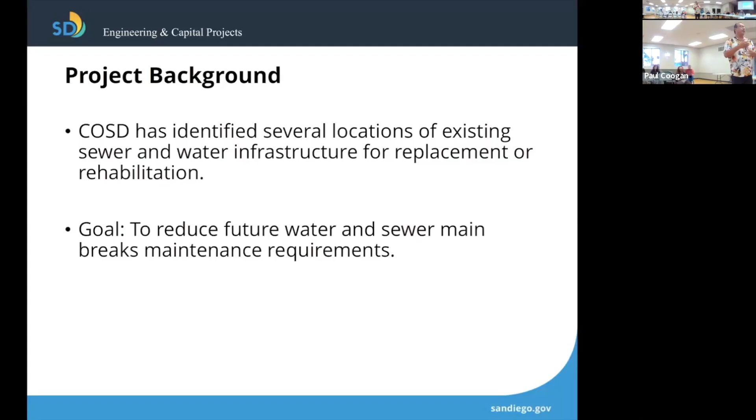So what we're doing is replacing over 1.6 miles of existing AC asbestos cement water mains with PVC water mains that will last about 100 years. So this will be the only time you get a presentation for this area, unless you're around in 100 years. We're also going to be constructing approximately 0.2 miles of new water mains.

Other improvements include water services—these are the lines that go from the main to the water meter outside the properties—valves and appurtenances including air valves, and they may include cathodic protection, all these little fittings that go into building a pipeline. Also, fire hydrants will be installed or relocated. There's a certain standard where fire hydrants need to be within a certain number of feet, so in designing this project, they're making sure the fire hydrants are all within code.

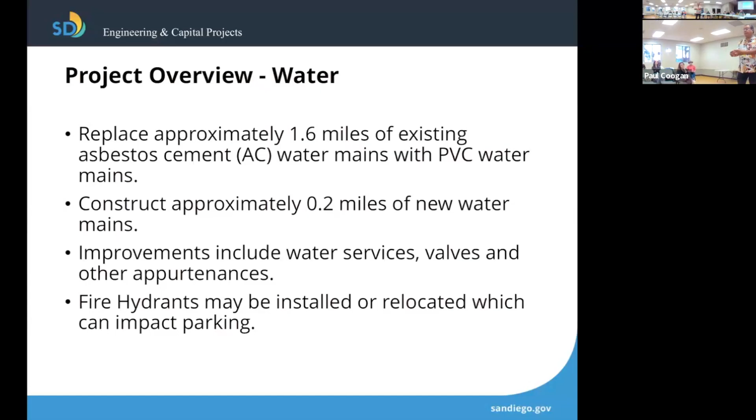And yes, we may impede some parking by putting fire hydrants in a place where there wasn't one before, but we'll talk to the residents. Remember, these hydrants are being put in the city's right of way.

For the sewer, just a little more than 0.5 mile of existing vitrified clay and concrete pipe sewer will be replaced with PVC pipes. We're going to rehabilitate about 1.25 miles of existing VC sewer mains, install new sewer manholes, and rehabilitate other manholes. If you haven't seen the process of rehabilitating manholes, it's pretty cool.

Also, the installation of manholes is interesting because they go deep, and it's amazing how they find exactly where the lines are and how it flows. I am in awe of engineers and what they do. I can't do it, I can just talk about it, but the way they do it is great. And if you ever feel like just walking up and asking if you can take a look, they'll put a hard hat on you and have you peek down the hole. Go ahead.

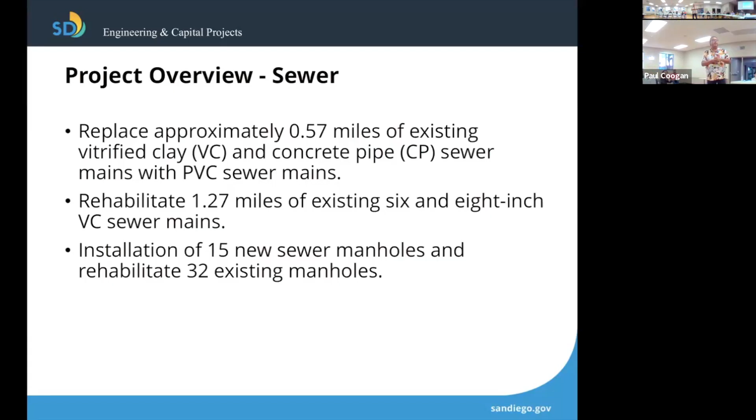Part of every city project involves improving curb ramps, and when I say improving, the ADA standards change all the time. So part of these pipeline projects includes the assignment for the builder to improve the ADA ramps, bring them up to code. In some places, we may not be going just right on the street corner, it may be off in the middle of the street, which gives a nice line to a curb ramp on the other side of the street. But when we do that, there may be some street parking that gets eliminated or some landscaping, but remember, that's all within the city's right of way.

And then we were tipped off that there was concern about the intersection at Arthur and Mansfield, which does not have curb ramps. It's missing 3 curb ramps. Those curb ramps will be installed, and the other one that's there will be upgraded to meet the current standards. So that area is included.

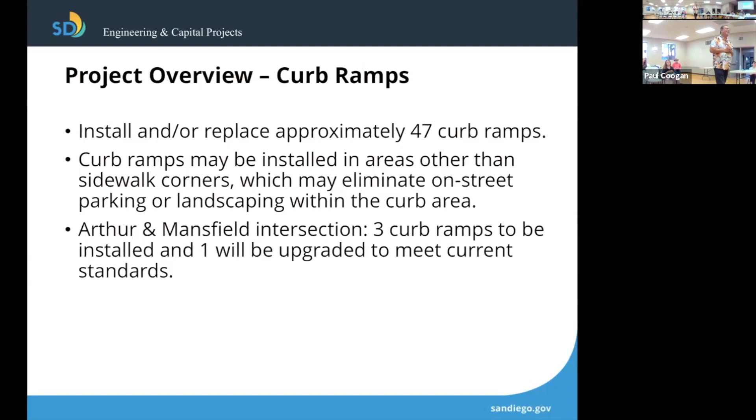Also, if you didn't get one, we have the handout, the fact sheet here that has the map of the location of where we're working. So if you didn't get one, let us know. We were able to spread them out before, a couple of the people came in a little later, but that map is there.

So when we work in neighborhoods like this, and this is all residential, we are going to be impacting parking. When we're working, we are required by the city to put out temporary no parking signs at least 72 hours ahead of time. Please pay attention to the dates and also the hours. If you see that the dates may have expired and we're still working in there, give me a call and we'll get that corrected. But if we are working in that area and you have not moved your car, you will get towed.

The project will also have city-approved traffic control. What we're doing when we're closing the streets or maybe doing a temporary detour isn't random, it's studied, it's signed off. So the traffic control is approved.

Trench restoration: the area that we dig up will be trenched, and the trench will be covered with an asphalt covering at the end of working in that area. At the end of that project, I'll tell you how we're going to go ahead and cover up that trench with pavement, but I'll explain that in just a couple of seconds.

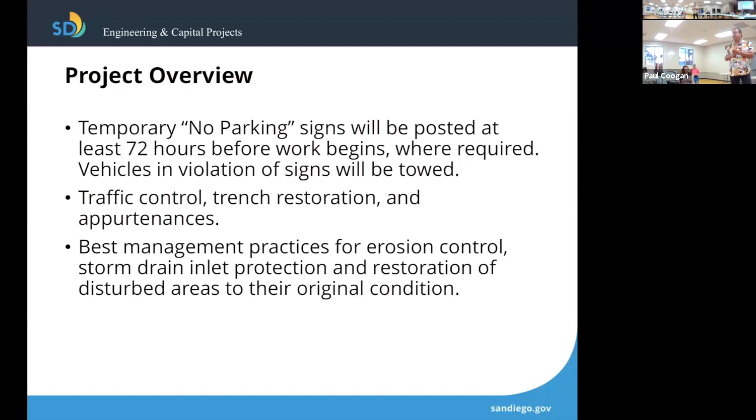And then of course, our best management practices for erosion control. We don't want anything going down the drains. The city keeps a really close eye on the debris of these projects, and the contractor could face a fine, they don't want that. So we are very careful about protecting what goes down the drains and within the street, dust, etc.

This is a design build project. What the city does is they put these projects out to bid, and an engineering firm and a construction firm team up. They decide their approach and also their costs. They submit that to the city in competition with other design build teams. The city scores these and has their formula as to how much they rate for the plans, how much they rate for the total overall budget, and they give the award. Again, the award for this project went to Michael Baker International and TC Construction. I do want to say our project schedule is subject to change, so we will let you know if anything changes, but right now, summer of 2027.

So we received some questions ahead of time, and I want to go ahead and address these now. There's an undergrounding project that's coming in this area. We have coordinated with the undergrounding project, and they will follow us in terms of street resurfacing.

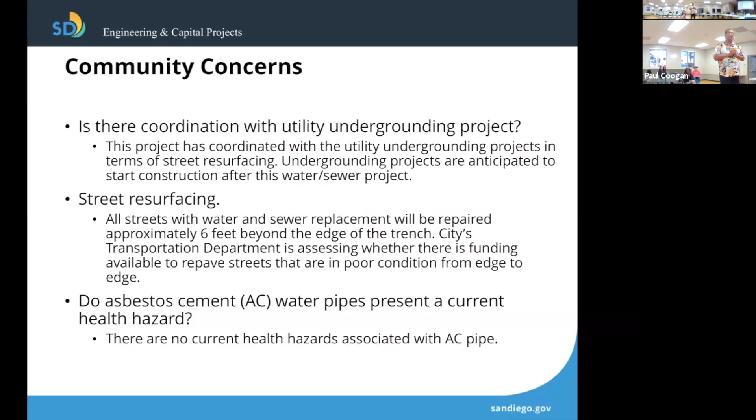Will the water pressure be increased? Well, there will first be a decrease in water pressure, but we are going to utilize our 2-inch high line along the curb. These are pipes that go along the curb that hook into your water meter. Because they're 2-inch and they're serving a large area, you're not going to get as high pressure as you would if we were on the water main. So want to let you know that if you see a high line in front of your house, your water pressure isn't going to be the same as it was, but it will come back once we set you up with the main line. Also regarding the high lines, please exercise caution when parking next to a high line.

Don't park on it. It'll break and it'll knock the water out for everybody down the line, and then it has to come and get repaired. It does happen. We do our best to educate the public about this. We just ask, if you see somebody parking close to a high line, do a neighborly thing and say, hey, watch the pipe, because we want to make sure we have water.

The new water main on Collier Avenue will improve hydrant flow capacity. And just know that the hydrants, before they get put into service, are pressure tested to meet current standards. So we don't anticipate that you will have any loss in that water pressure.

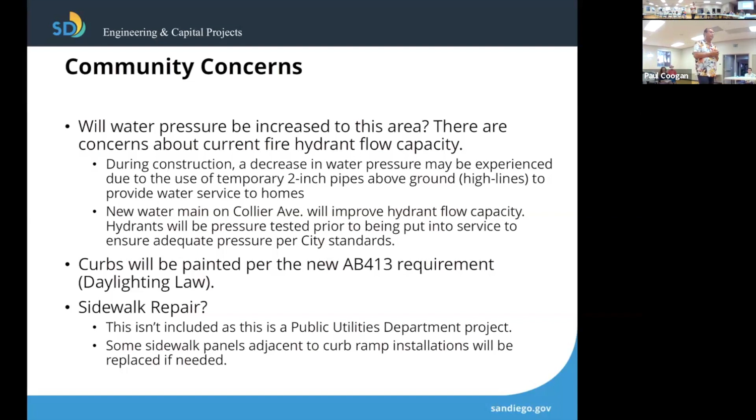Drainage issues. Our engineering firm, Michael Baker, is looking at methods to improve drainage in conjunction with where the curb ramps are, because we want to make sure that we don't flood out those curb ramps.

What we will not be doing is leveling out any streets. We had a question about whether the crossing at Collier will be level. This project will not do that. If we can urge you to go to another part of the city and urge them to do it, you do that by going on the Get It Done website and filling out a ticket saying, you know, you may want to take a look at this, but that is not in the scope of our project.

And finally, can community serve cookies and coffee to the crew? Please start with cookies and coffee and then work your way up to full meals.

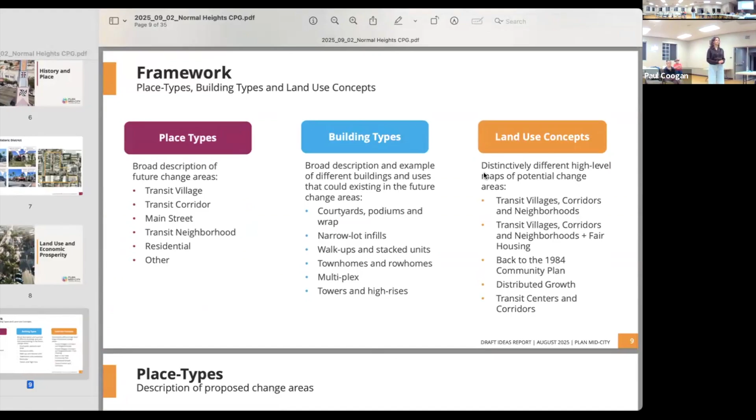These are the framework of the land use section. We're going to dive into place types, building types, and the land use concepts to help break down this chapter. I'll go into each one now.

Next, transit neighborhood and residential: this is medium and low density residential, might have some corner stores, access to transit, jobs, and neighborhood serving uses within walking distance. Any other area: this is little to no change, including single family zoning, as well as some lower density residential areas, schools, civic, public land, parks, canyons.

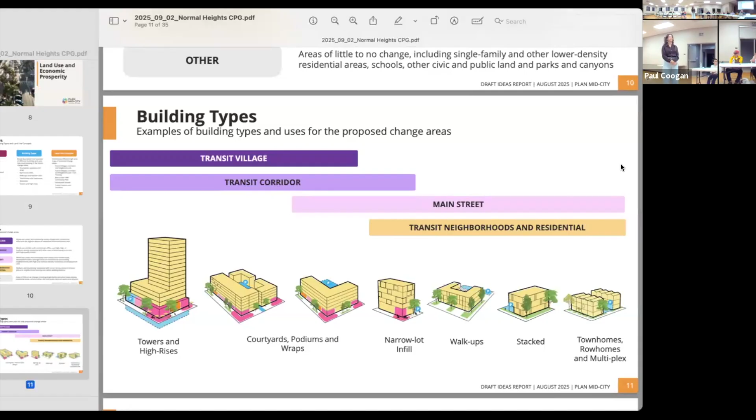On the next slide, building type. These correlate within each of the place types. You'll see the place types from the previous slide on the screen, and these are the building types you would see within each. For example, in transit village and transit corridor you might see towers, podium, or courtyard buildings. Moving into Main Street and transit neighborhoods, you might see more narrow lot infill, townhomes, duplexes, that sort of building type.

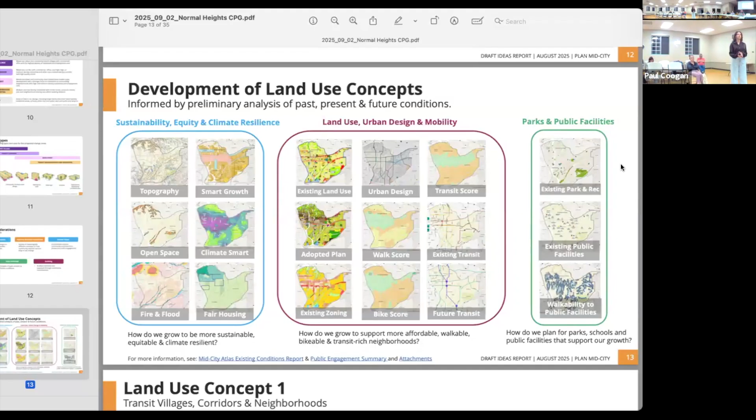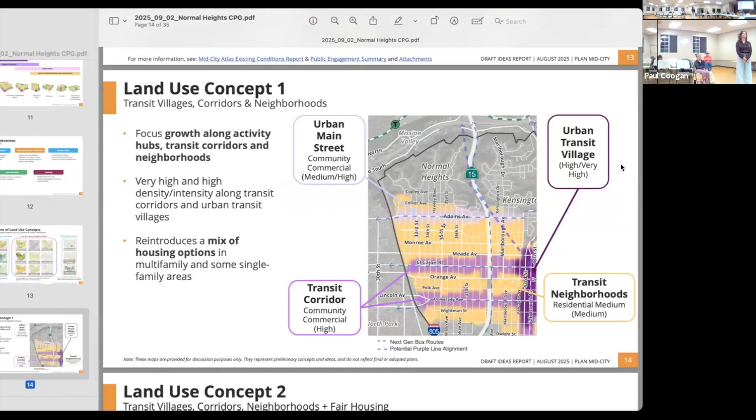On the next slide I'll walk through the first one. Again, there are 5 draft concepts. This first concept focuses growth along activity hubs, transit corridors, and neighborhoods. You'll see very high and high density intensity along transit corridors and urban transit villages, those purple colors, and it reintroduces a mix of housing options, multifamily and some single family areas, in that orange color.

On the next slide, land use concept 2. This is pretty similar in the sense that it focuses growth along the activity hubs, transit corridors, and neighborhoods.

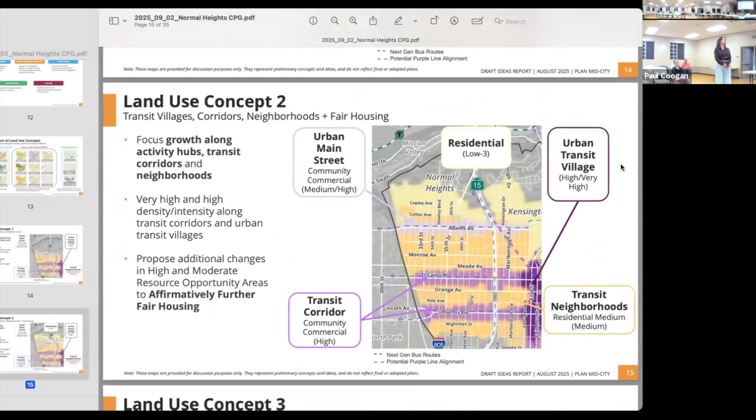It also has very high and high density intensity along transit corridors and urban transit villages. Where it differs from concept 1 is that it proposes additional change areas in high and moderate resource opportunity areas to affirmatively further fair housing, shown in yellow on the map.

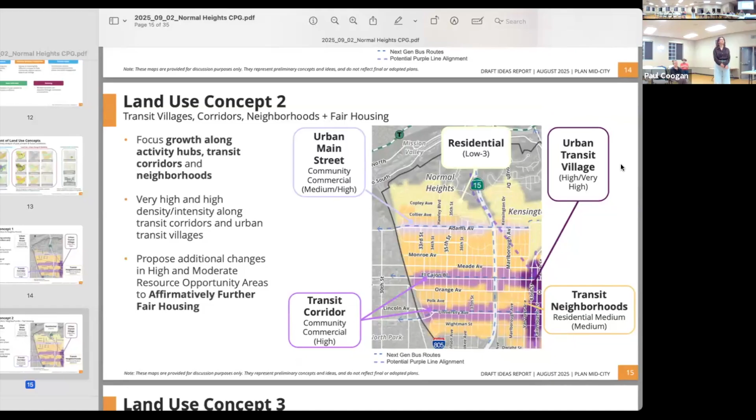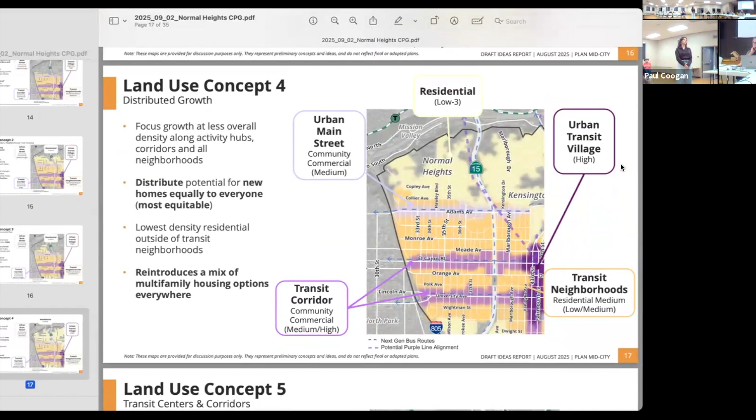Land use concept 4: distributed growth. This concept focuses growth at less overall density along activity hubs, corridors, and all neighborhoods, distributing the potential for new homes equally to everyone. Of all the land use concepts, this is the most equitably distributed in terms of change areas. It has the lowest density residential outside of transit neighborhoods and reintroduces a mix of multifamily housing options everywhere.

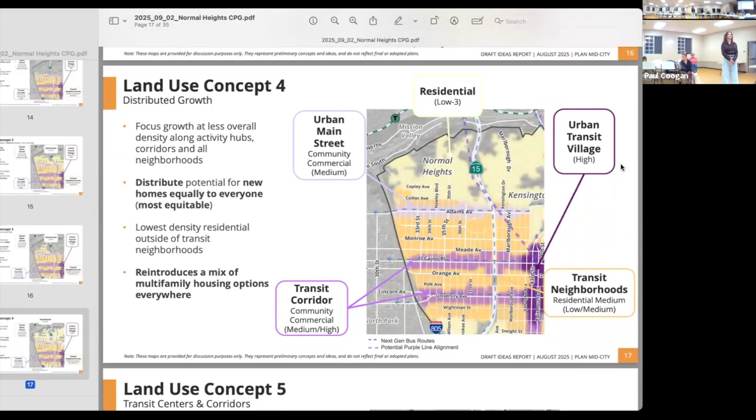Land use concept 5 focuses growth along activity hubs and transit corridors. This is the highest density intensity of all five concepts along the transit corridors and urban transit villages, and there's no change proposed to most of the multifamily and single family areas.

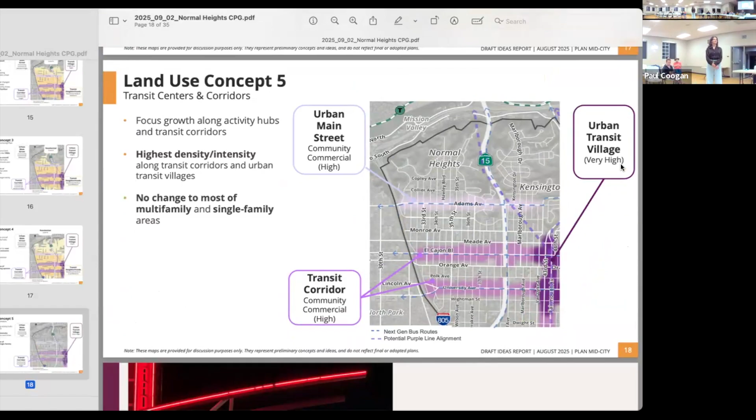Moving on to mobility. This is the currently planned pedestrian network and facilities in Normal Heights, broken up into intersection and mid-block projects shown by those points, as well as corridor projects along Adams. Intersection and mid-block projects could be something like a crosswalk or curb extension, while corridor projects could be a landscaped median area or a network of those intersections.

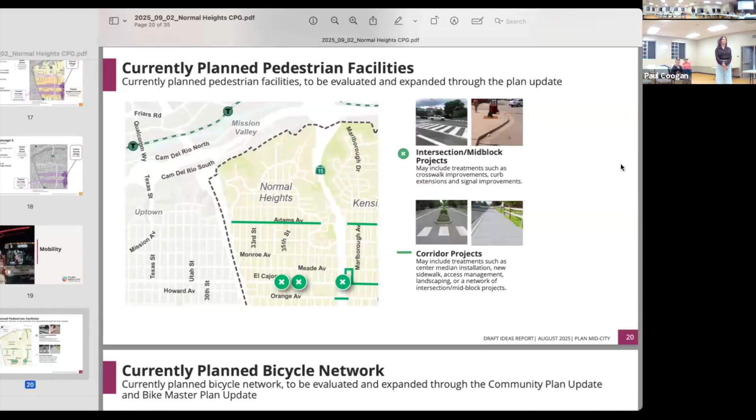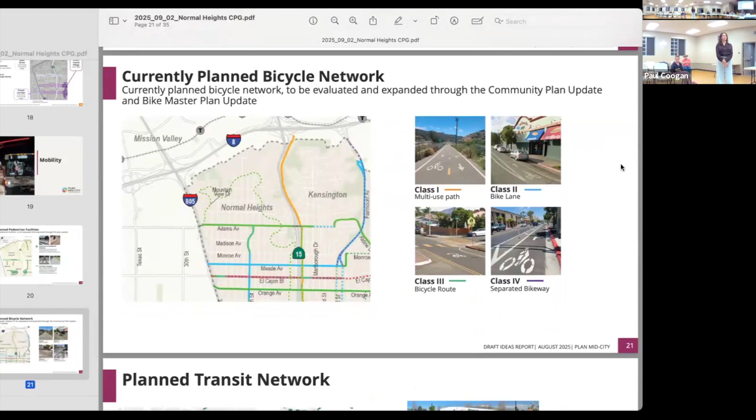Next, the currently planned bicycle network. This is to be evaluated and expanded through this planning process alongside the bike master plan update happening concurrently. The solid lines are bicycle facilities on the ground today, and the dashed lines are what's proposed.

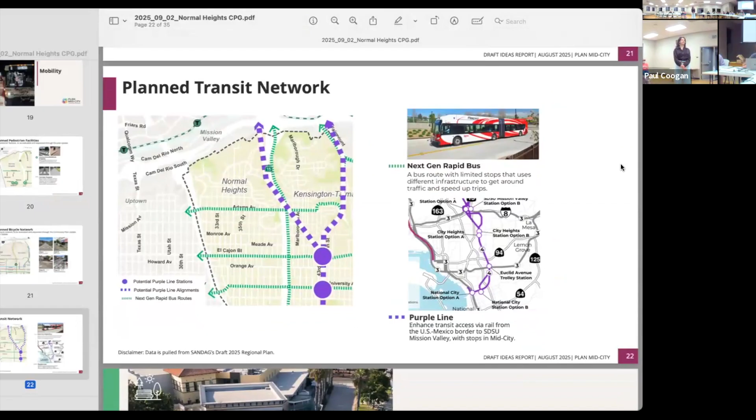The planned transit network: those greenish dashed lines are the next gen rapid bus network, with limited stops on the bus routes compared to a typical transit network, but also with different infrastructure to speed up the transit route, such as transit priority signals or bus-only lanes. The proposed purple line is proposed by SANDAG, a draft potential alignment going both ways, connecting the US-Mexico border to Mission Valley with two stops in City Heights, along El Cajon Boulevard and University, both at Fairmount.

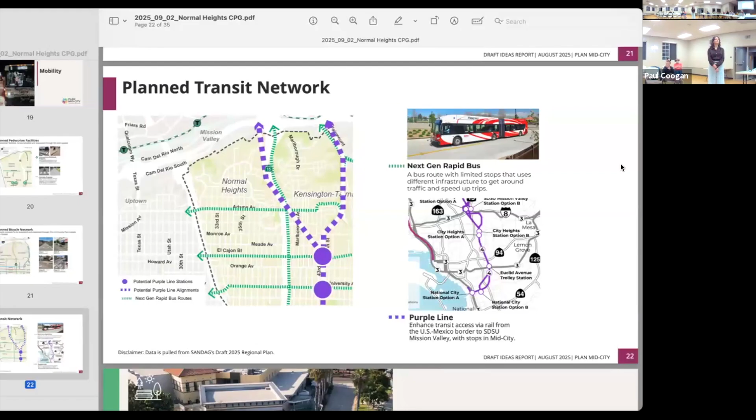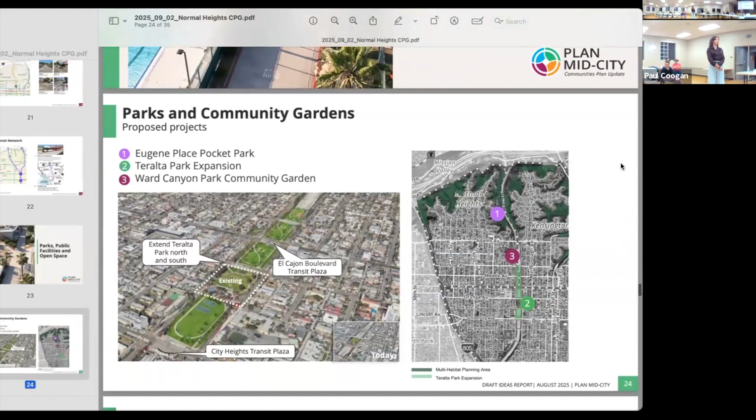Moving on to parks, public facilities, and open space. The next slide shows parks and community gardens. There's a proposed park at Eugene Place, a little pocket park overlooking SR-15. The Teralta Park expansion is a pretty big project we're proposing, actually initially proposed in the 1984 Mid-City Communities Plan—we're just bringing it back.

It would look at extending the freeway lid from University all the way up to Monroe to reconnect the neighborhoods that were previously dissected by the freeway. Lastly, the Ward Canyon Park Community Garden—we heard a little interest tonight about this, so we're acknowledging that.

And on the next slide, urban forestry. I have a request to...

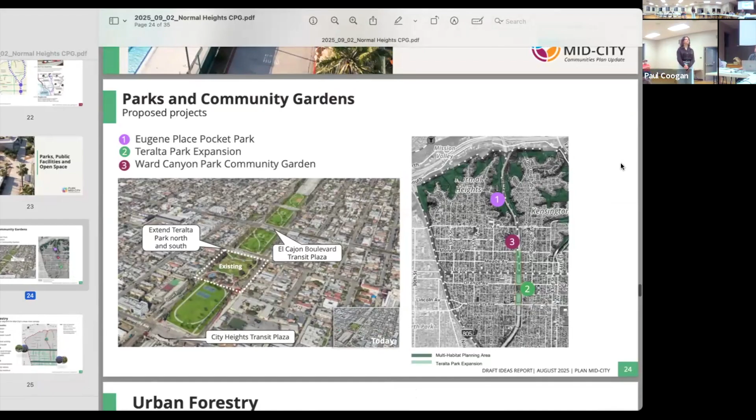Sure, the name of the community garden would be Normal Heights Community Garden, even though it's Ward Canyon. Thank you, yeah, we can absolutely change that. Okay, Normal Heights. Thank you.

For urban forestry, this is looking at the street tree network throughout Mid-City. The thicker lines on the map refer to a specified street tree list—one or two consistent trees for a cohesive neighborhood character, like the jacarandas and Tipu trees along Adams. Those lighter green color corridors can use any city-approved street tree. Any street without one of those green lines either doesn't currently have a parkway where we could plant street trees, or it has a network of palm trees.

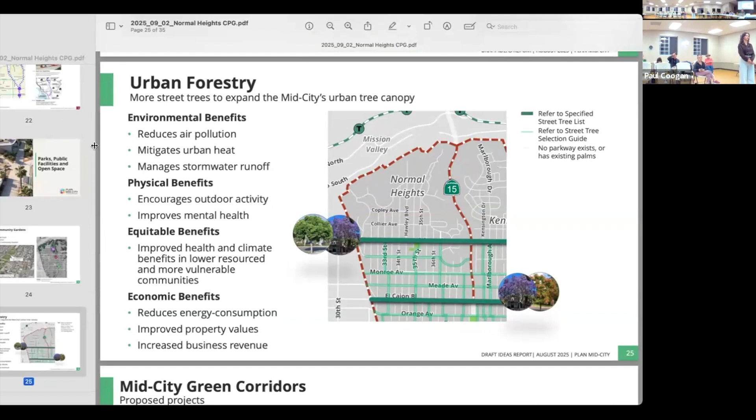On the next slide, green corridors. Green corridors are an expanded landscape parkway and an enhanced parkway with potential for a bicycle facility adjacent to it. We're looking at that on 40th Street, adjacent to the SR-15.

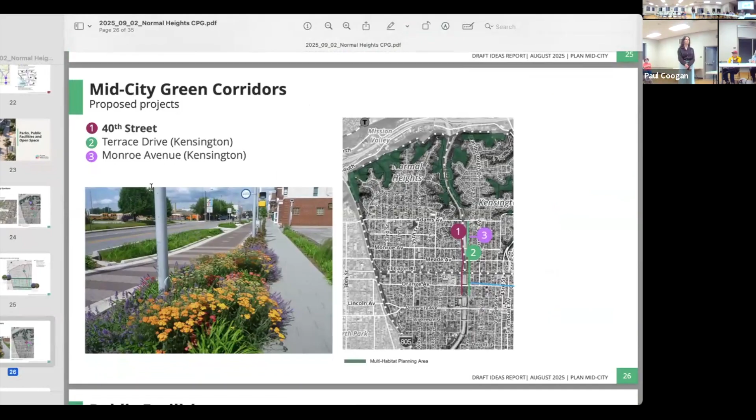And then outside of Normal Heights, but next door in Kensington, we're also looking at Terrace Drive and Monroe Avenue.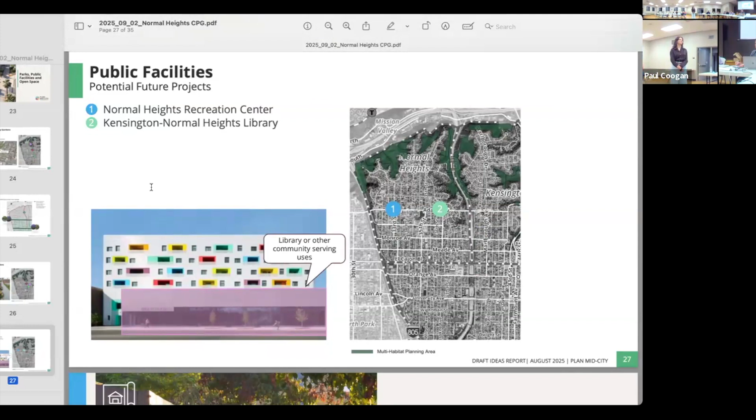On the next slide, urban design and study areas. The draft ideas report has identified 8 study areas throughout Mid-City, related to land use, urban design, mobility, and public spaces, with some high level concepts. One of those 8 study areas is in Normal Heights along Adams Avenue. We're also looking at potentially identifying more study areas, and there will be refinement to the study area I'm talking through tonight. So going through Adams Avenue, next slide.

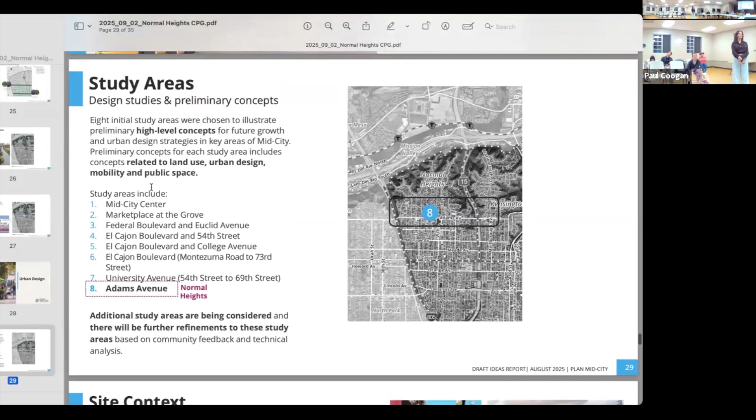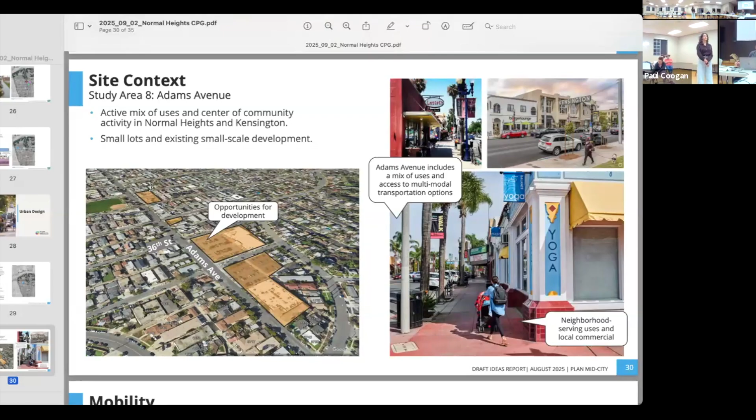Adams Avenue has a very active mix of uses. It is the center of community activity in Normal Heights and in Kensington. It is characterized by small lots and existing small scale development. There is access to multimodal transportation options, and it has neighborhood serving uses and local commercial.

On the next slide, the mobility context. As mentioned, it has a high active transportation propensity, with a lot of people walking and biking. There's a history of bike collisions throughout the corridor, pedestrian collisions at 32nd Street, and a high demand for on-street parking. So potential early identified needs are opportunity for curb extensions as well as permissive left turns. There is also a planned rapid bus route, a rapid version of the 11.

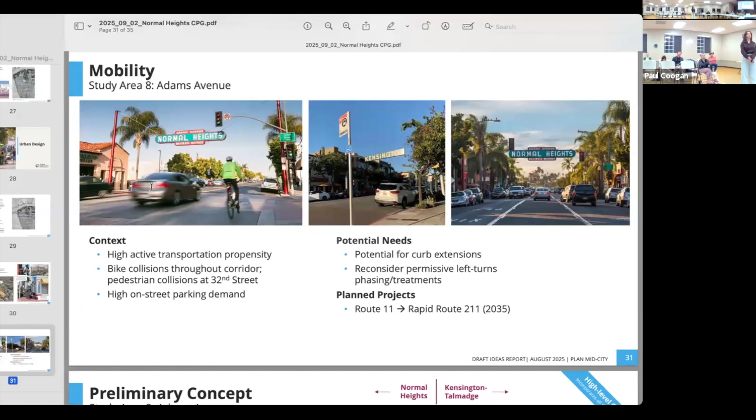The preliminary concept looks at the heights and densities oriented towards Adams Avenue. The heights would transition outward towards the single family homes. Back on Adams Avenue, we have active ground floors, a mix of uses, and we would identify underutilized commercial areas and lots for increased housing density and community amenities.

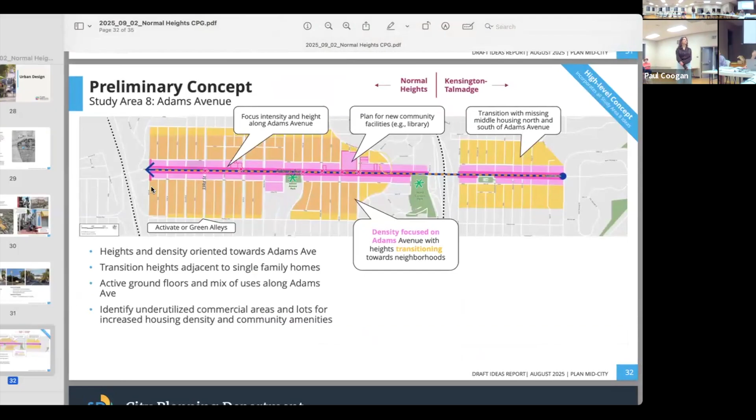So what's next? You can visit our website at planmidcity.org. Our next working group meeting is on October 29th, I think at the Park de la Cruz gym. We'll cover topics from the draft ideas report, such as history and place, urban design, mobility, parks, public facilities, and open space for all of Mid-City, diving into it deeper.

We'll have our working group members there and this is open to the public. You can provide comments to the draft ideas report, which is linked online. There's a public comment forum, and there's another 2 months to leave comments. So please take the time to really digest the ideas report, especially the land use concepts, and leave some feedback.

We're also just launching our second round of public engagement. Part of that is coming here tonight into all the planning groups. We're also going to be hosting office hours, opportunities for one-on-one meetings open to anyone in the public. You can schedule 15-minute sessions with us to really talk through any of the ideas in the draft ideas report or in general related to the community plan update.

And you can always send us an email at planmidcity@sandiego.gov. One of us will get back to you, and we are in the midst of planning some additional outreach events over the next few weeks. You can sign up for our email blast list on the website. And with that, we are available for questions.

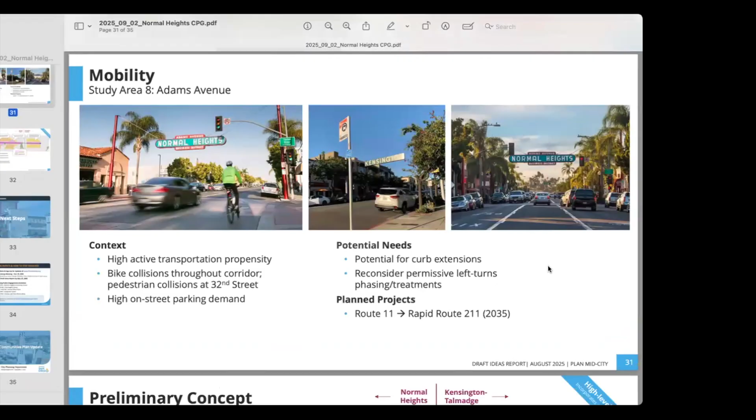I saw there's a mention of bicyclists, but is there any way to include some language on that right side? Let's see, potential for curb extensions. So potential needs, I don't really see anything from that meeting where we talked about our needs reflected on this page. And I know you've got limited space and there's many other needs out there, but that would be my request: if we could somehow convey what 30 or 50 bicyclists communicated in this public forum and get that into the plan update, to just say we would really like some safer bike facilities on Adams Avenue through Normal Heights. Thanks.

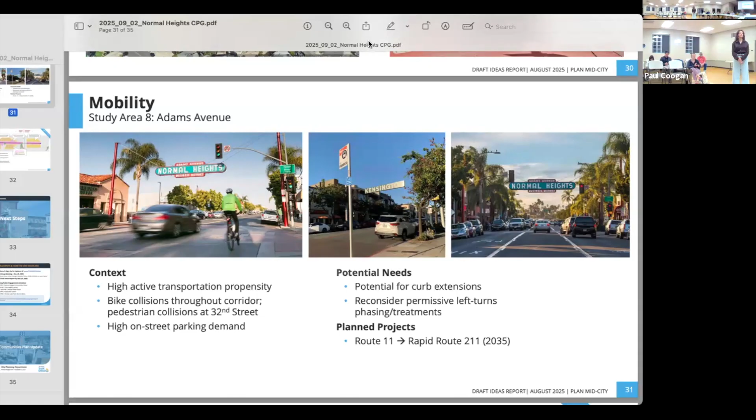Yeah, thanks, Paul. Great question. So these study areas were developed before we came to the last Normal Heights meeting, so we haven't had an update yet. Right now we're still presenting the report that was released in August. So we haven't seen new things yet that'll come in the next draft.

But I hear and appreciate your comments. I myself rode my bike here tonight on Adams Avenue, and I'll be taking it home. So I definitely appreciate your insight, as well as some other cyclists in the room. And those are things we're looking at.

There is also, you're probably already aware, but for others, the bike master plan update that's happening right now. They are taking public input. You can even go to the Ciclo SDias event where they're shutting down a good stretch of University Avenue on Sunday, October 26th. We'll have some city staff there representing the bike master plan and mobility master plan update. So that would be another good venue to share that input with, but we are working closely with those mobility teams and we do share public comments as well, since they're the ones analyzing potential for that.

Thanks for being, very comprehensive presentation, thank you. I have a yes or no question and then a further question. Is the Normal Heights community garden considered a park, which would be incorporated into the deficiency in this area? Yes or no?

That would be a community garden, so it's an amenity within, inside of it. So not a park. The community garden is not itself a park, but it's like an amenity. It would have a recreation value point added to it.